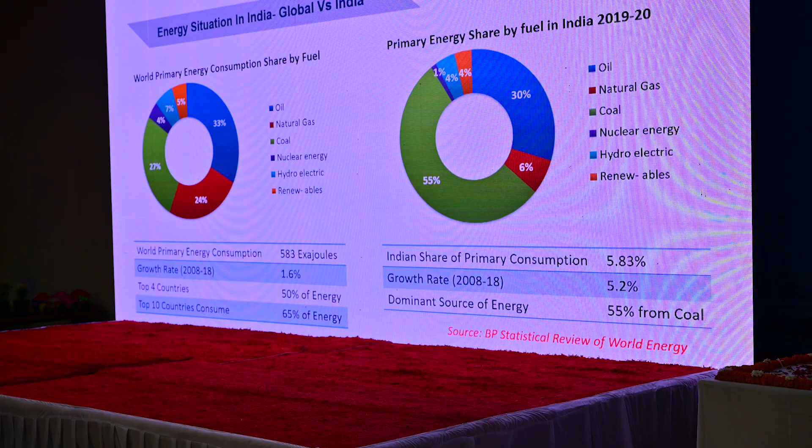Even then, we are the third largest consumer of energy. As I said, the global energy growth rate over one decade is only 1.6% - that means every year the energy demand in the world is growing at the rate of 1.6% only. Whereas for India, it is going at the rate of 5.2%, and it is set to grow further higher. So our energy demand is going to increase further.

Now, the top 10 countries consume about 65% of the total energy, and the top 4 countries consume 50% of the energy. So this energy distribution is not uniform.

The other energy challenge is energy security. Niti Aayog published a paper, the energy security plan or India Energy Security Scenario for 2047. They also indicated that by 2047, coal is going to remain the only dependable energy source for India.

Next, oil dependency on foreign supplies, and quality of coal - we know the quality of coal will go on deteriorating.

Energy access - India has done very well in terms of energy access. The per capita energy consumption is only 24.9 gigajoules versus the world average of 75.7 gigajoules. So per capita it is less, but in quantum we do consume a lot, because of the blue flame revolution, clean cooking gas being supplied to every household, and 100% electrification for all areas.

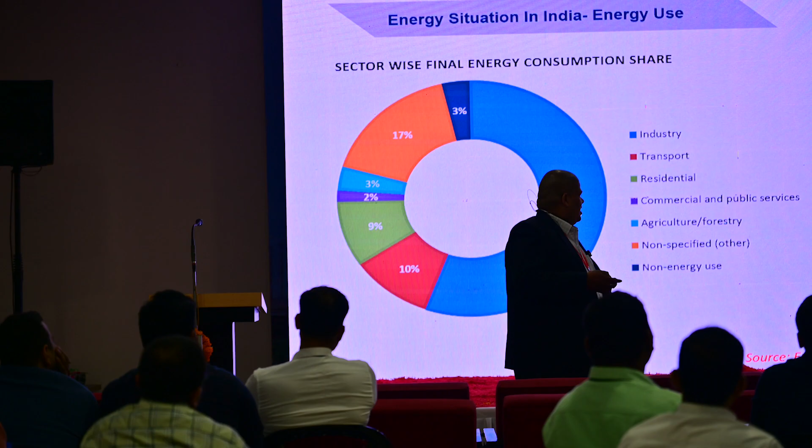Now, coming to energy efficiency and conservation - in terms of policy regimes, the energy management group was established in NPC in 1964. Till that point, there was no activity on energy efficiency in India. After that, in 1970 a fuel policy committee was set up in the planning commission, and in 1978 the Petroleum Conservation Research Association was formed. All these activities finally led to the Energy Conservation Act being notified in 2001.

After the Energy Conservation Act in 2001, over the last two decades there have been a lot of developments - many rules, regulations, and guidelines have come up for all industry sectors, based on which we are carrying out so many activities.

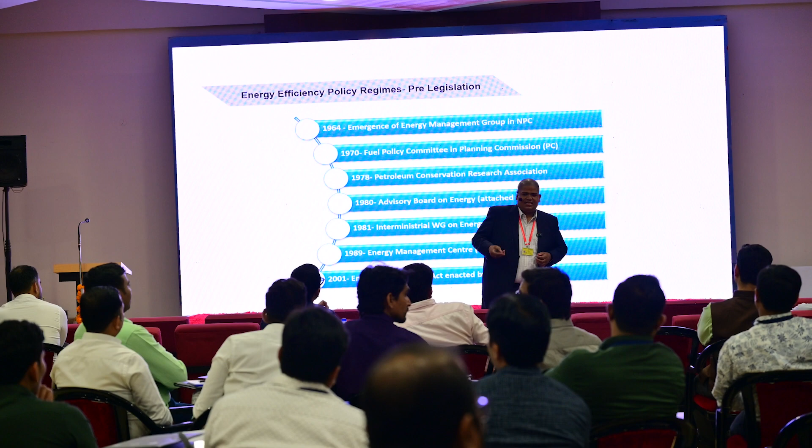Now, in NPC, we are talking a lot about the Bureau of Energy Efficiency, the energy efficiency. In another 2-3 years, this term energy efficiency is going to be replaced by resource efficiency, because now it is not only energy, there are other resources required for industrial production also. There was a draft guideline by the government on the national resource efficiency policy, so later on we will be transiting into resource efficiency guidelines rather than energy efficiency.

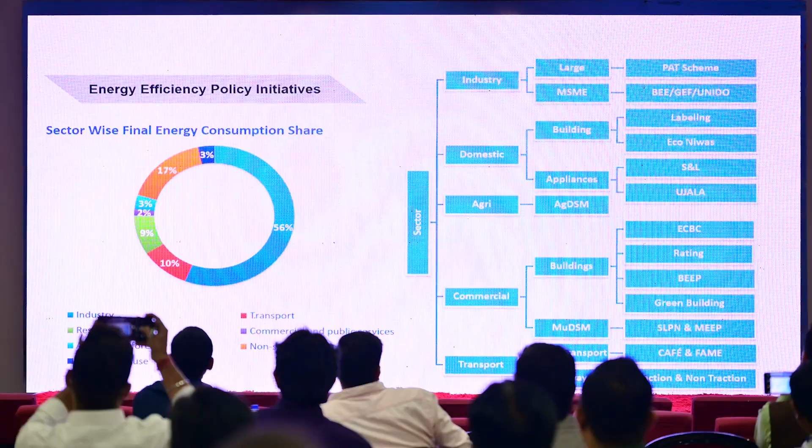This is basically the distribution of guidelines under the Energy Conservation Act, where we are focusing on energy efficiency processes. There are mainly 5 sectors: industry sector, domestic sector, agricultural sector, commercial sector, and transport sector. These are the consumers of total input energy, and till now the government has brought guidelines for every sector to reduce the national energy demand.

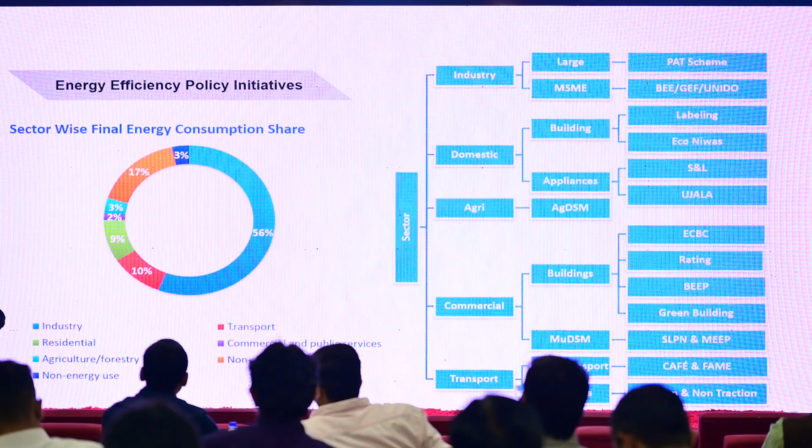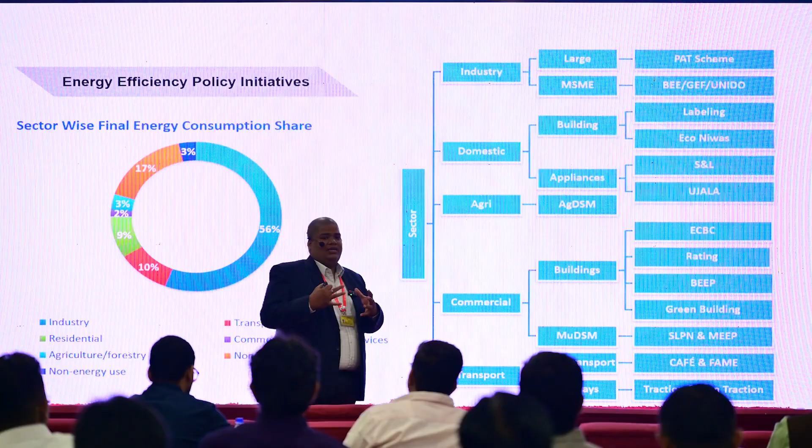If you see the industry sector, again it is large scale industry and the MSME sector. In large scale industry, we know very well about the PAT scheme - Perform, Achieve and Trade. SAIL is a designated consumer under the Energy Conservation Act, so SAIL also has to comply with PAT scheme guidelines. For MSME, since they are not large scale industry, their financial capability is not as strong, so they need a lot of support from the government for demonstrative projects that bring energy efficiency benefits. UNIDO and the DCMSME office are in association, and a lot of schemes are being implemented. We are also a part of it - 2-3 schemes we will discuss later.

Under agricultural sector, there is AGDSM - agricultural demand side management activity - because in agricultural activity basically they are targeting electrical pumping stations, since we need to pump water for agricultural distribution.

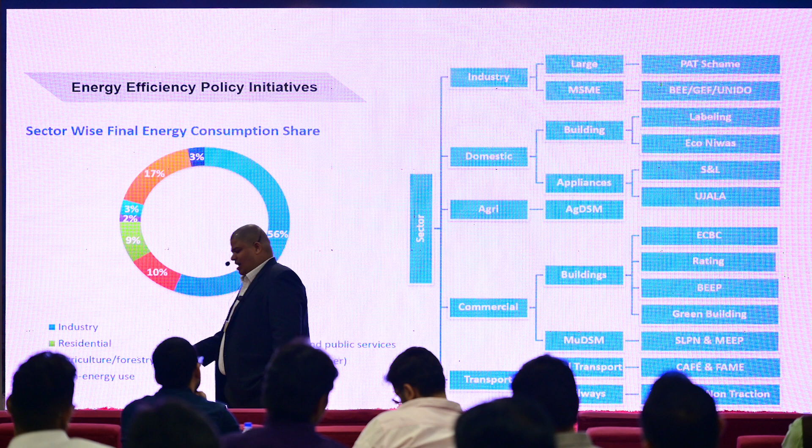Again, under the commercial sector, basically there are 2 things - buildings and MUDSM. For buildings, there is ECBC, Energy Conservation Building Code, which has now been amended; the draft is on the website inviting suggestions. Once the draft is finalized, the revised ECBC will come up, with rating of buildings similar to products. In the municipality sector, basically two programs are running - street lighting replacement with LEDs, and the municipal energy efficient pumping replacement program.

Under the transport sector - road transport and railways - there are two categories. For road transport, it is CAFE and FAME, the BS4 to BS6 transition, and star rating of tires. This is still voluntary, which is why we are not aware of it, but vehicle tires are also being star rated based on their energy efficiency. Railways again have traction and non-traction categories. So these are the 5 sectors and all the schemes being promoted by the government for energy efficiency.

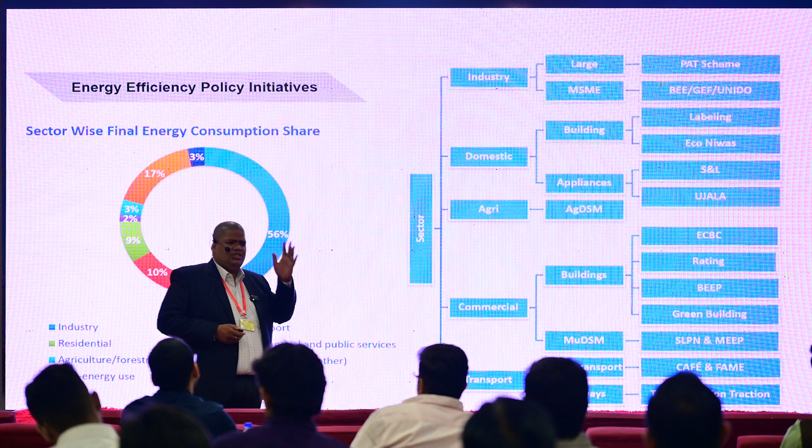But as a large scale industry, we are only concerned about the industrial sector, which is the PAT scheme. Of course, as a domestic consumer, buildings, Eco-Niwas, or appliances also apply to us. Now, coming to today's topic on boilers - efficient boiler and operation of boilers.

Still there is a problem. If you say so many PAT cycles are there, a lot of things has been done, so much energy saving is achieved, still there is some problem. From the industry perspective, when you implement one recommendation, yes, energy saving is achieved, you are okay with that. But from the productivity analyst side, we see it in a different way. I think this is important to discuss with you.

See, if we categorize energy efficiency recommendations, there are 4 types or 4 ways in which we can achieve energy efficiency. One is O&M control - for example if your boiler temperature is above the design or increasing, there is no meaning of that, so there should be a drop in temperature. These are basically pressure drop, pressure changes - these are O&M controls.

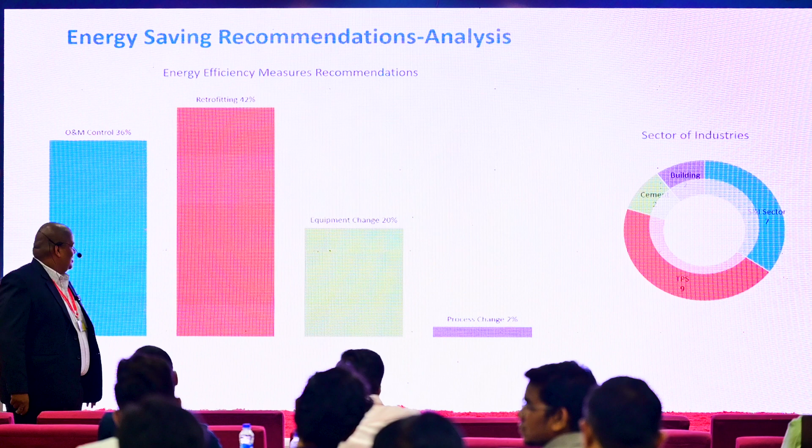42% recommendations are on retrofitting. 20% on equipment change, 2% is process change. I also agree process change is difficult.

Okay, now in the other 3, 80% is coming from O&M control and retrofits, which is not a good sign.

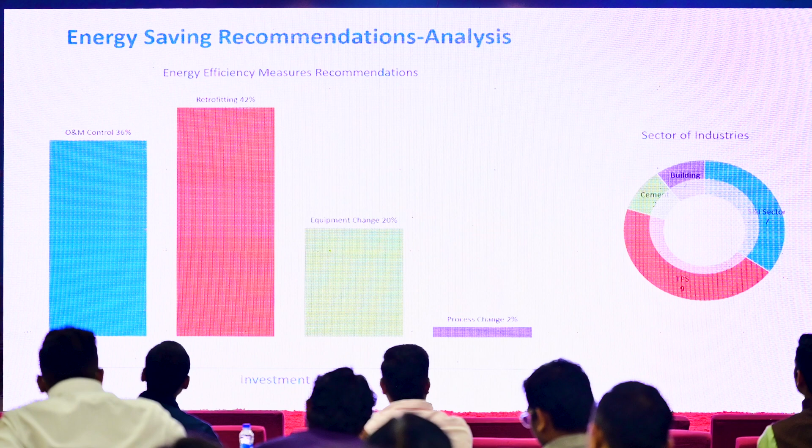Now, okay. You see the implementation part - that was the recommendation part. Now in the implementation part.

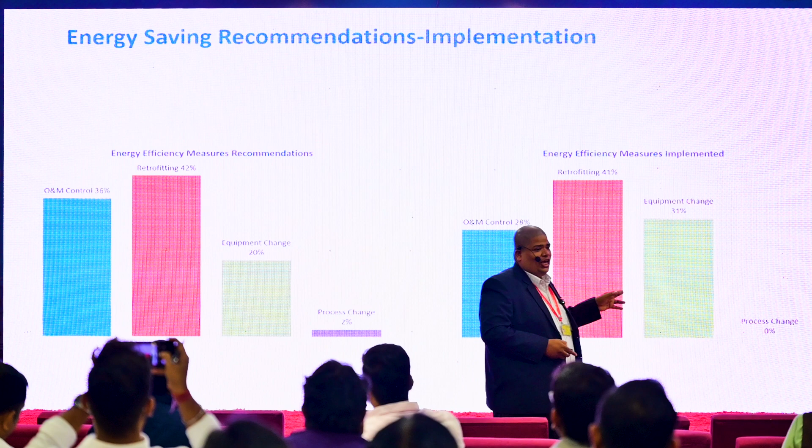28% of recommendations were implemented in O&M, 41% in terms of retrofitting, 31% in terms of equipment change - we'll discuss this 31 and 41. Process change: 0%. Nobody is accepting the process change recommendations.

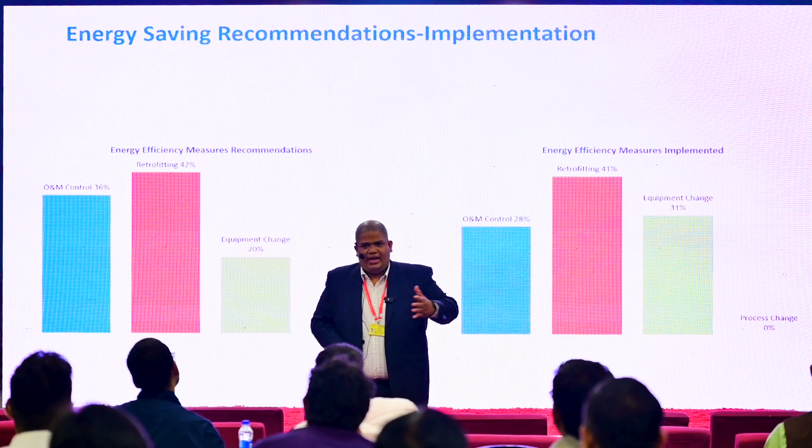Frankly speaking, we don't do process change in the plant. See, when we say process change, people think okay, process change means something is going to happen in my blast furnace - they won't agree, it gets shut down. But if a water pipeline is going somewhere, you take a tapping from it - sir, that is also a process change. When there is a pipeline, when pumps are operating in parallel, and you are taking a number of tappings, the pump efficiency will go down. That is also a process change.

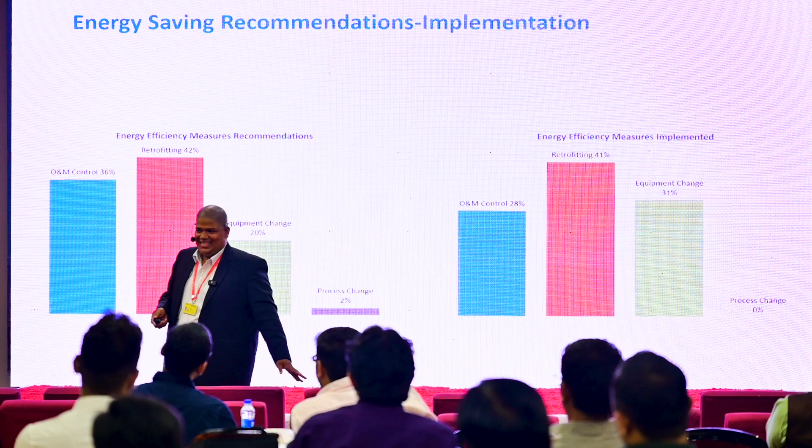Extending a compressed air pipeline - that is also a process change. Retrofitting and equipment change have a little higher recommendation implementation rate because of the introduction of IE3 motors, energy efficient pumps, and so on. There was also a building in this category - because of LED changes there is an impact in equipment change, and retrofitting because of VFDs. Now, coming to the boilers, boiler performance.

So, boiler performance in our plant, how do we carry it out? We carry it out through some standards - ASME PTC 4.1 or IS standard. As per the ASME PTC standard, we follow or carry out the boiler efficiency evaluation.

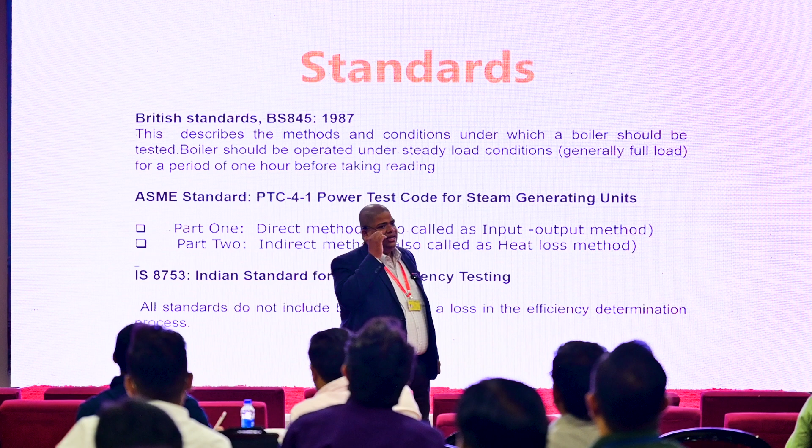If you see the BEE guidelines, there is a direct method, that is the input-output method, and another is the indirect method through the heat loss method. In direct method, we are only looking at output versus input.

Output is boiler output, which is my steam. Steam has some energy. So how do we find that energy? At that pressure and temperature, how much kilocalorie energy it is carrying, that is the output. For input, I know the fuel. If it is coal, quantum of coal into GCV is the energy input. If it is oil or gas, quantum of fuel into GCV or NCV is the quantum of energy.

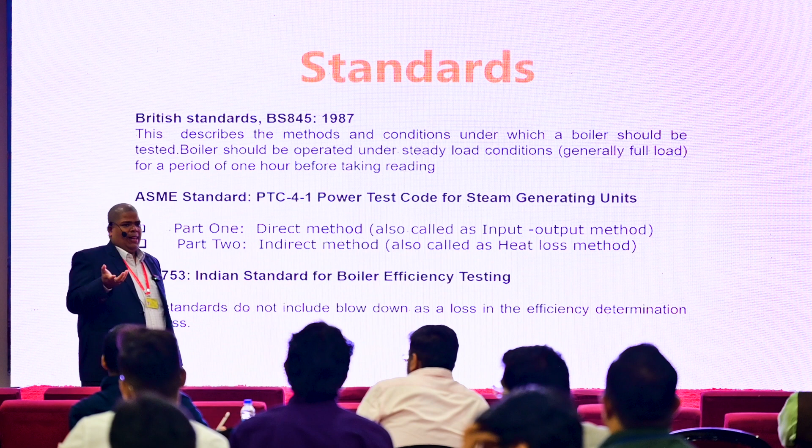We can use the direct method, but most frequently we use the indirect method, because in indirect method we evaluate all the types of losses. So when we see all the losses, we can see which parameter can be controlled, which parameter can be brought down. We evaluate all the losses, and 100 minus all the losses gives you the boiler efficiency.

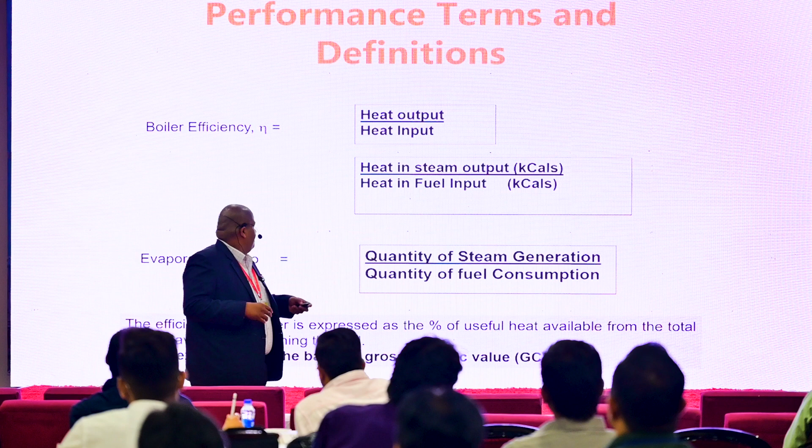This is the indirect method. Direct method is very simple - output divided by input. Output is nothing but your steam flow rate into enthalpy of the steam minus enthalpy of the feed water, because the water coming into the boiler is also carrying certain amount of energy. That difference is actually the energy added in the boiler. So output is only the energy added in the boiler, divided by energy input which is the quantum of energy fired to the boiler. That is the direct method.

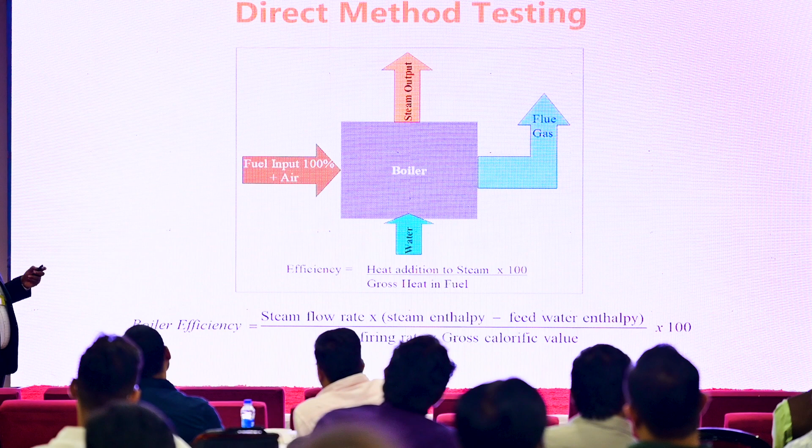In the indirect method, we measure all the losses, then find out what is the quantum of efficiency. First one is dry flue gas loss. What is dry flue gas loss?

When we do a process mapping of a boiler, how many inputs are we giving to the boiler? We are giving 3 inputs - air, fuel, water. These 3 are the inputs to the boiler. And when we see the output, the water goes out as steam, so it is in a closed cycle. The only loss is the blow down part, which we will discuss separately.

When we are doing the ASME PTC 4.1 method of efficiency evaluation, the blow down valve has to be closed during the test time, which is typically around 3 hours. That is why ASME PTC 4.1 does not speak about blow down loss - they don't consider blow down as a loss, because during that time your blow down valve is closed.

But during the running condition, depending on your water treatment plant efficiency, you have to give the blow down. Now that is the water cycle - so now water is in the closed cycle.

Now there are 2 inputs, that is your air and the fuel. The air is at ambient temperature, goes in and comes out as flue gas through the chimney at a higher temperature. Because any matter's quantum of energy content can only be of 2 types - sensible heat or latent heat. So the air, which is only gaining temperature during the combustion process and going out through the chimney, is only gaining sensible heat. So the quantum of heat carried away by the flue gas is nothing but dry flue gas loss.

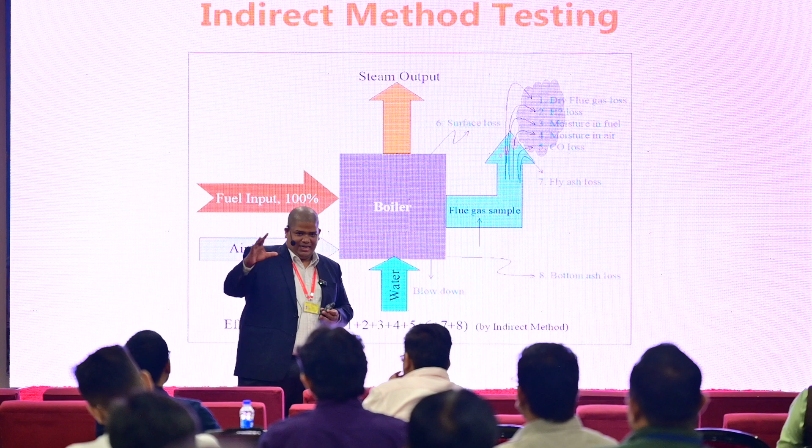Why dry? Because it's sensible heat - the moisture will have both the sensible and the latent part. So only this is the dry flue gas loss. The quantum of air goes in, takes up heat, and goes out at a higher temperature. Now, H2 loss - what is H2 loss?

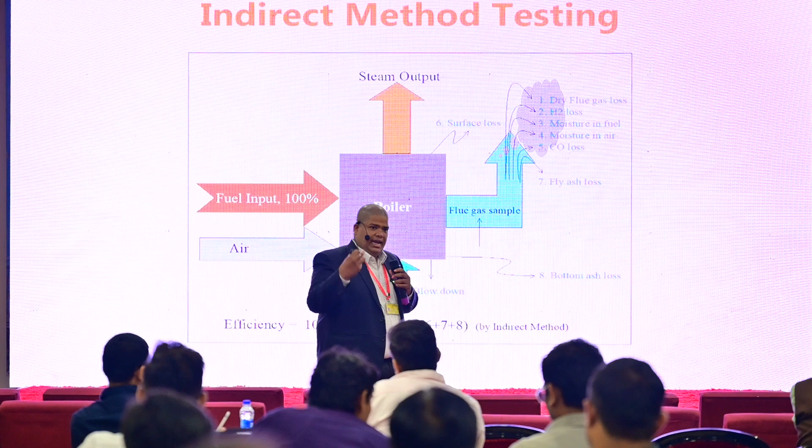That is the hydrogen loss. And as you said, there is also moisture present in the fuel. If coal is carrying some quantity of moisture, that will also take the latent heat plus sensible heat, because that water is at ambient temperature. It will go into the furnace, gain the sensible heat, then latent heat, then go out as vapor.

So H2 loss, moisture in fuel, then moisture in air. Because of the relative humidity, you also have moisture in air. What heat will it carry? It will carry only the sensible heat, because moisture in air is already in the vapor phase, so it will carry only the sensible part and go away.

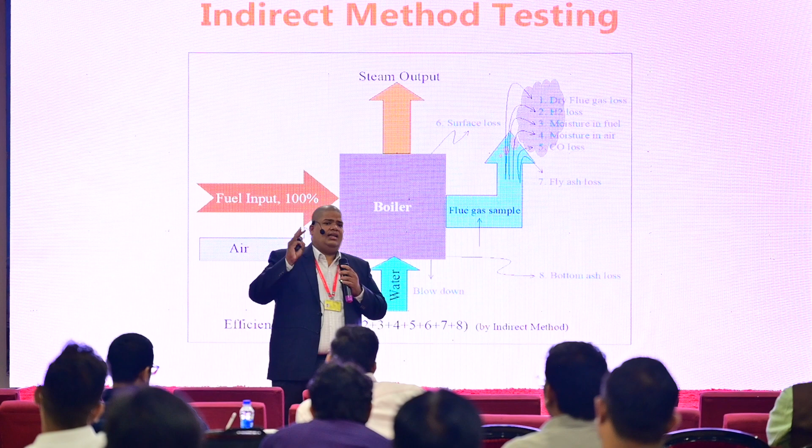CO loss happens due to incomplete combustion of fuel and air. Combustion is basically an exothermic reaction. Carbon combines with oxygen producing carbon dioxide. Hydrogen combines with oxygen producing H2O. Sulfur combines with oxygen producing sulfur dioxide. Only these three chemical exothermic reactions take place during combustion, and they produce energy. No other chemical reaction produces energy.

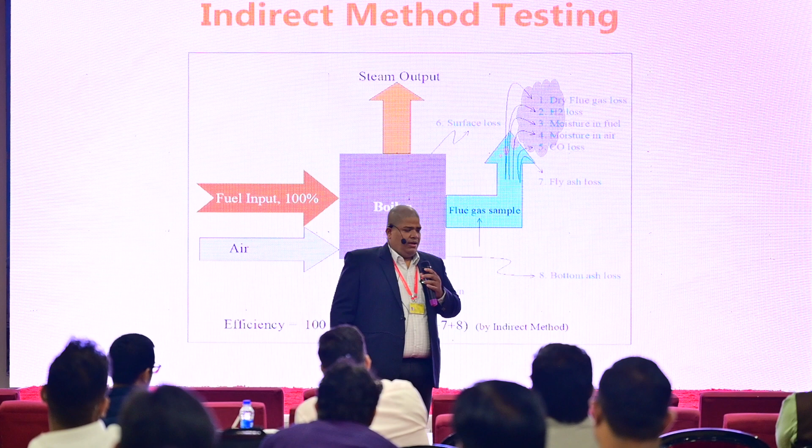Now coming to CO. When you are firing 1 kg of coal, let us say it has about 30% carbon. So fixed carbon quantity is 30%, meaning 300 grams per kg is carbon. But what we are supplying for combustion requires carbon and oxygen. In place of oxygen, we are supplying air, which has only 23% oxygen. So this 230 grams per kg of air and the 300 grams per kg of coal has to properly mix to produce the quantum of heat.

Now this proper mixing in a boiler requires a firing mechanism and a draft system. These two ensure proper mixing of coal and air for producing energy. If the proper mixing of coal and air is not there, you will see carbon monoxide. Carbon monoxide means partial combustion. Partial combustion means how much energy loss?

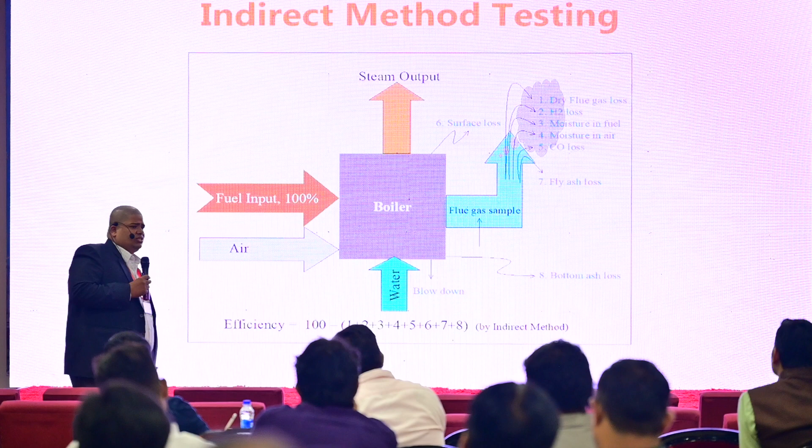Then ash loss. If it is coal, there will be bottom ash and fly ash. So the ash coming out of the boiler will have some quantity of unburnt material present in it. Why unburnt? The air-fuel mixture first will reflect in CO and the carbon content in the bottom ash or fly ash. The second factor is the size of the coal particles.

So regarding the size of coal particles, if you see the technological development of boilers, it started with the spreader stoker boiler. Before that was hand firing, like in coal engines where hand firing was done with coal. Whatever lump size came, you just put it into the furnace chamber. Hand firing, spreader stoker, then...

Yes, now pulverized technology came, and after pulverized, AFBC and CFBC came. So you see, up until pulverization technology, where 70% passes through 200 mesh, 75 micron size coal, the coal size was coming down and coming down.

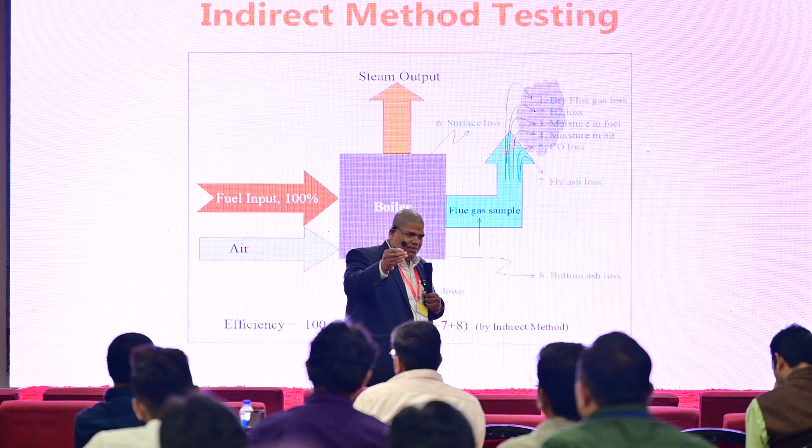Why? Because when we bring down the coal size, there is a high chance of carbon particles combining with oxygen producing carbon dioxide. That is why more quantum of heat was produced up to pulverized technology. But what happened is, again from pulverized to CFBC, we are increasing the coal size. CFBC uses 6 to 10 mm coal size.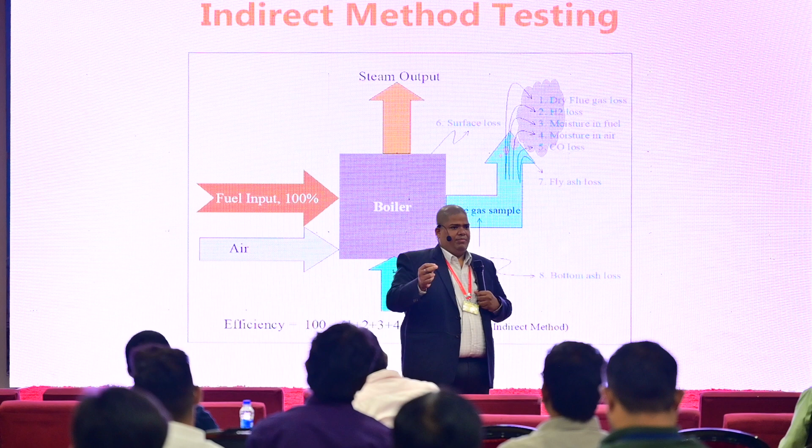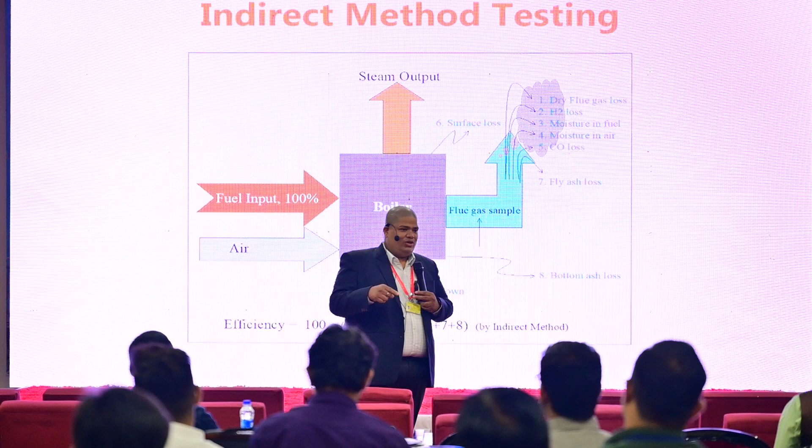The finer the coal, the more electrical energy you require for pulverization in the mills. So there is an energy balance - the quantum of energy you spend creating the fines, when you burn it, you should get more than that back. But when your ash content is as high as 45%, for every kg of coal you grind, you get 450 grams of ash. So to avoid that, we use higher coal size.

Because of coal quality only, we have gone for CFBC boilers. There are other advantages too, which we will discuss.

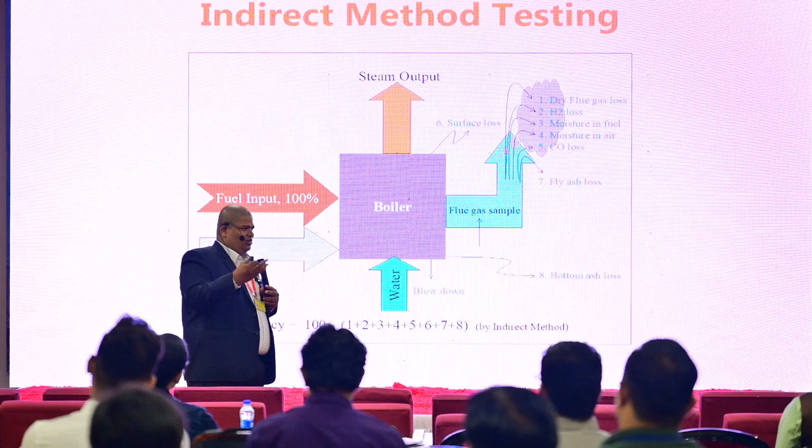Now, surface loss, the last loss, that is the radiation and convection loss from the surface of the boiler. This is very easy, the calculation method is also easy. I will not go into the calculation methods.

We will discuss some case studies. So basically, what data do you require for the efficiency calculation? All this data we measure every day in the power plant, in the boilers.

You require the ultimate analysis of coal. Ultimate analysis of coal is nothing but carbon, hydrogen, oxygen, nitrogen, sulfur, H2O and ash. If you have facility to conduct the proximate analysis but not the ultimate analysis, you can conduct the proximate analysis, and there is an empirical formula to find out all these factors.

You want ultimate analysis of the fuel, GCV, and oxygen of the fuel flue gas. Oxygen in the flue gas - normally for the boiler part, we say oxygen after eco exit, oxygen at the eco exit.

So there is an oxygen probe. During the energy audit also, we bring in our probe and measure the oxygen at the eco exit, because after eco exit, there is no role of the O2. So 3 to 4% excess oxygen is required, because we want to maintain 20% excess air to ensure the proper mixing of coal and air.

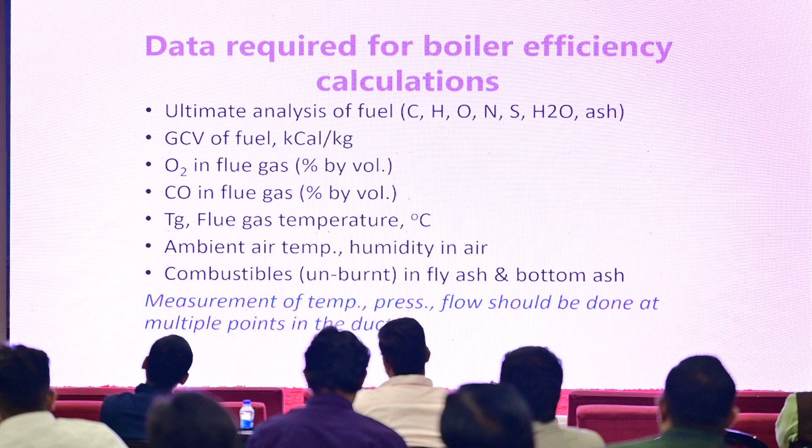CO in the flue gas - if the mixing is not proper, in most cases, even though there is excess oxygen, you will see CO also. Then temperature, ambient temperature, humidity, combustible in fly ash and bottom ash.

Only these data we require for the efficiency evaluation of the boiler. Right, sir?

So what instruments do we require? We require a flue gas analyzer, temperature indicator, draft gauge, and a flow meter.

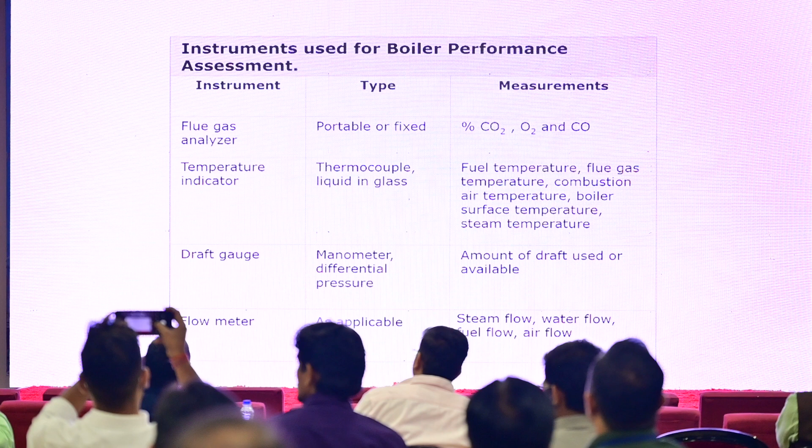If these data are with us, then we can find out. Of course, for indirect method, we don't require the flow meter also. If you have a pitot tube also, that is also fine, because for airflow we need to measure. Water flow meter is not required. If you use pitot tube also, that is fine.

Now in the duct, the measurement - our oxygen probe is fixed, a zirconia probe. Now that may not give a proper reading also. Sometimes there can be a stagnation of flue gas at that location.

So that is why it is always advisable that you carry out sample testing at different intervals.

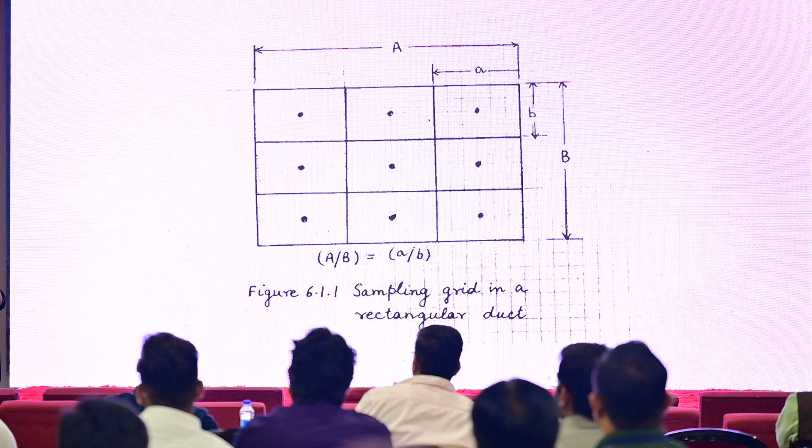So you can just be careful about the sampling techniques. If it is a square duct, how samples you have to take. If it is circular, how to take the samples. Then the specification, these things also matter.

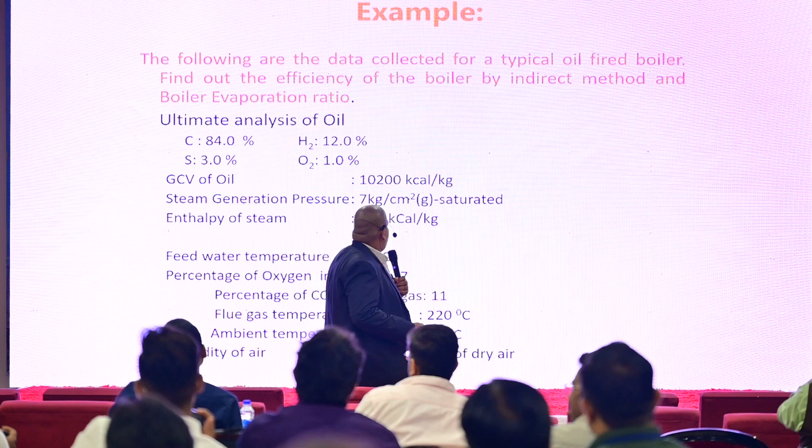The data sheet, and finally the efficiency evaluation. As I said, only the ultimate analysis of fuel is required. This is the oil example, oil-fired boiler.

So that is the GCV, then the steam pressure, enthalpy, feed water temperature, the oxygen in the flue gas, CO2 percentage - so oxygen or CO2, either is okay. Either you measure the CO2 or you measure the oxygen. Normally you have the oxygen probe, so you take the O2 measurements. Then the flue gas temperature, ambient temperature, humidity of air. These are the input data.

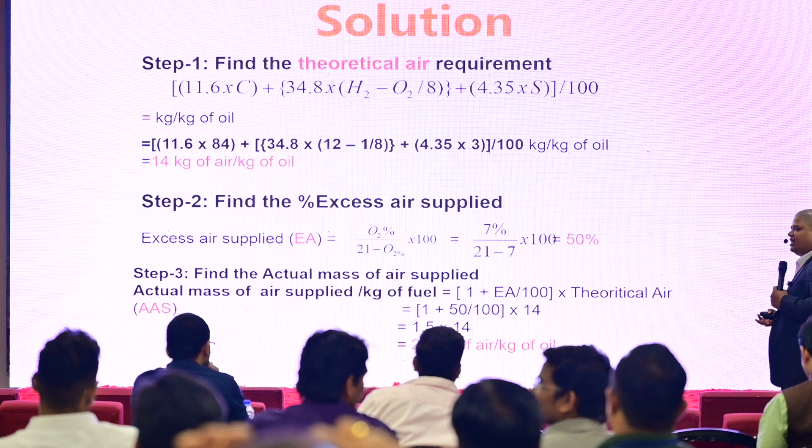This is a little bit of calculation. First is basically the stoichiometric calculation - stoichiometric calculation means the quantum of air required for your fuel. Because every shift the fuel quality is changing, and if every time the fuel quality is changing, the quantum of air requirement also changes. But at present, what control do we have?

Are we calculating the excess air, theoretical air in plant? No. Then what is the control mechanism? How we are doing the adjustments? Let us say today the coal is coming at 3500 GCV, tomorrow there is another coal which is coming at 4000 GCV.

Yes. So for us, we are only looking at the O2. Whatever variation in the coal quality may be, we have to maintain 3% O2.

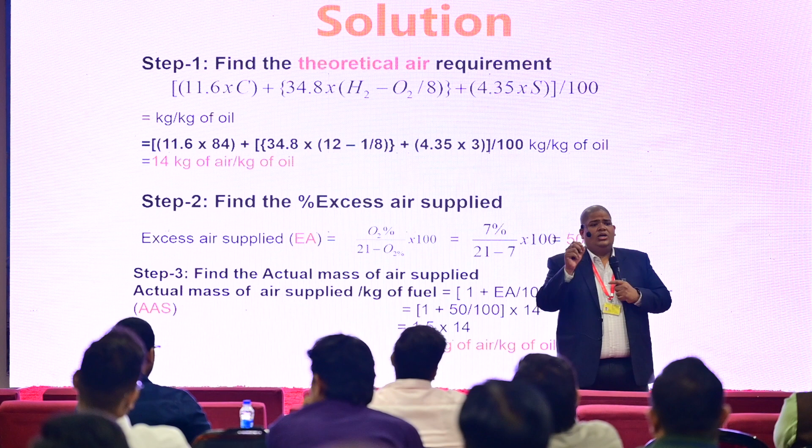So this is the theoretical air calculation. Then you measure the O2, find out the quantum of excess air. That means if you have 3% O2, O2 by 21 minus O2, so 3 by 21 minus O2, that is the percentage of excess air you are supplying into the boiler.

So 20% excess air is fine to ensure the solid fuel, but if it is gaseous fuels, you have to further bring it down.

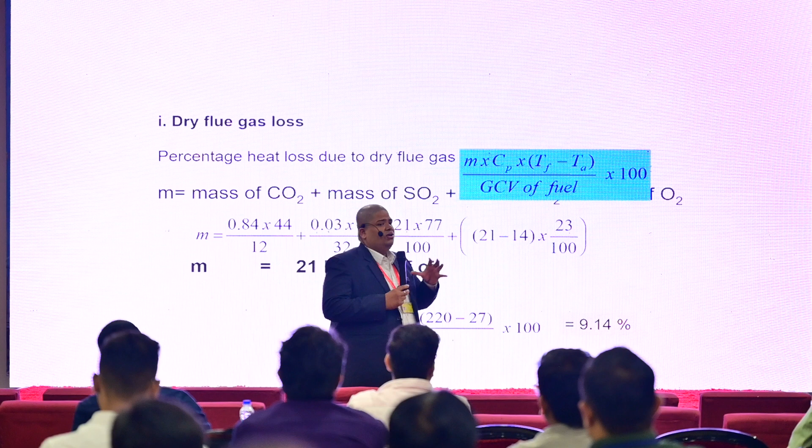Then the quantum of flue gas into m Cp delta T, because it is taking sensible heat only. So quantum of flue gas is nothing but quantum of air plus non-ash portion of the fuel.

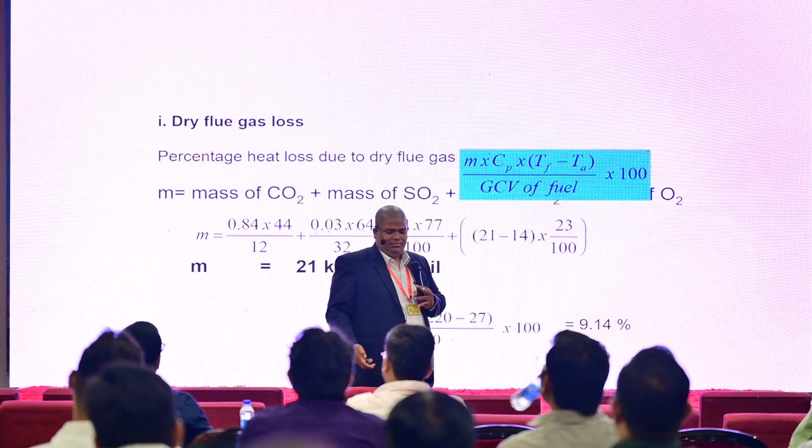Okay, then because of hydrogen, you see, hydrogen, as I said, it will take both latent heat as well as the sensible heat. So latent heat, how we calculate? M delta H, mass of water into delta H is latent heat of water, plus Cp delta T, sensible part it will take. So for mass of water, it is basically 9H2.

9H2, why? Hydrogen will combine with oxygen producing H2O. So 1 kg of hydrogen will produce 9 kg of water, that is why it is 9H2. So it gives you the mass of water. 584 plus Cp delta T, 584 is the latent heat.

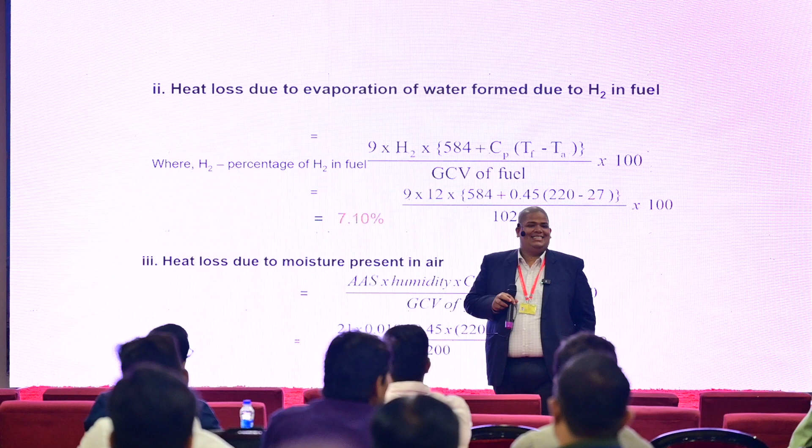At atmospheric pressure, what is the latent heat of water? Yes, sir? 540 kilocalorie per kg. So at atmospheric pressure, it is 540 kilocalorie per kg. Now, if it is 540 per kg, why it is 584?

Because the combustion is at a slight negative pressure. So if you see the enthalpy diagram of steam, it is a bell curve. So you reduce the pressure, more quantity of latent heat is required. That is the technology for supercritical, no? Supercritical, because in power plant we are not able to use the latent heat part.

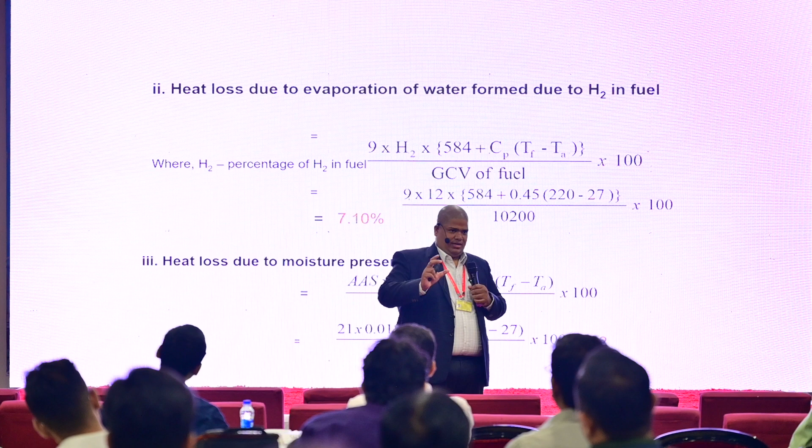So in supercritical, you increase the pressure to 221 bar, that is the critical point. So you don't require to supply the latent heat to the boiler. So that gives you addition in the plant efficiency. So when your pressure is low, your latent heat will increase.

Then of course the humidity part. When you add all the losses, bottom ash losses, fly ash losses, sensible heat losses, moisture losses, hydrogen, so you add, you will get the boiler efficiency.

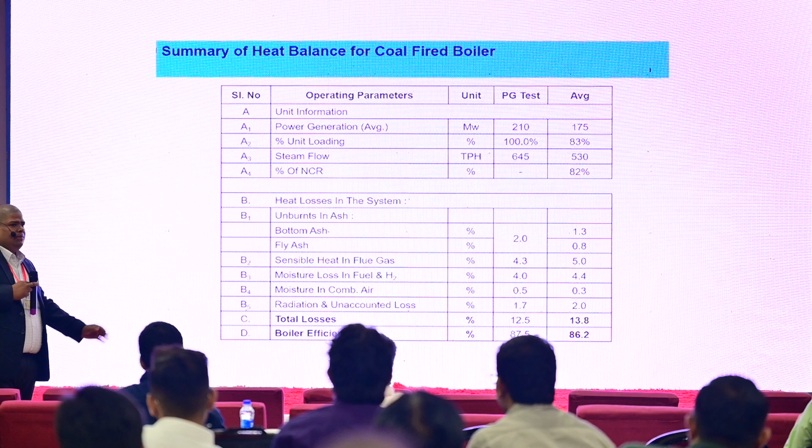Now coming to the interpretation of those results, the standard says this much. The ASME PTC 4.1 that we discussed, this tells us how to calculate all these losses, what are the formulas, what is the efficiency. But now as an engineer we have to interpret, because we cannot simply go by the recommendation and change the boiler.

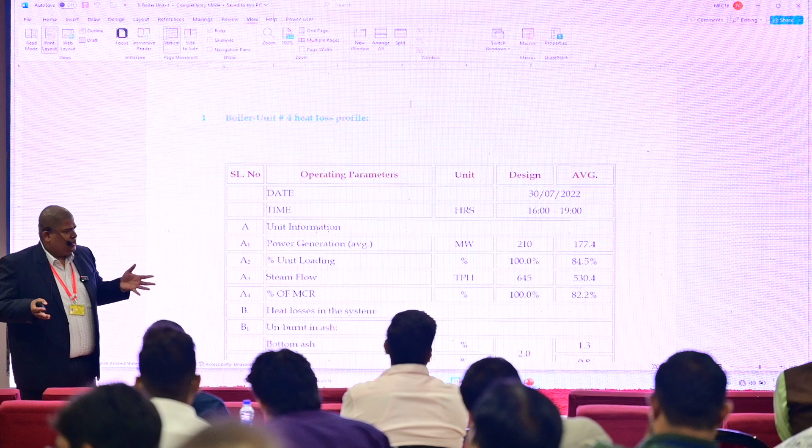This is a 210 megawatt power plant. Unit loading is 84%. So when we conduct the trial, we also ensure that it is above 75% loaded, because the loading will also have an impact on the efficiency. So loading is 84%, steam flow is about 82% of the MCR.

You see all the losses - bottom ash losses, fly ash losses, the sensible heat loss to flue gas, moisture and hydrogen loss, moisture in air, surface heat loss, total loss. So 87.8 was the design efficiency, 86.7 is the actual. So it's still about 1% difference, because there can be calculation errors and some assumptions. Surface and radiation losses are difficult to measure.

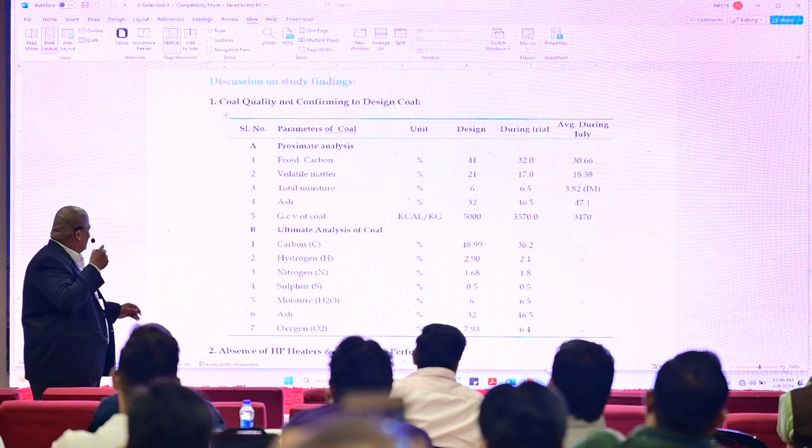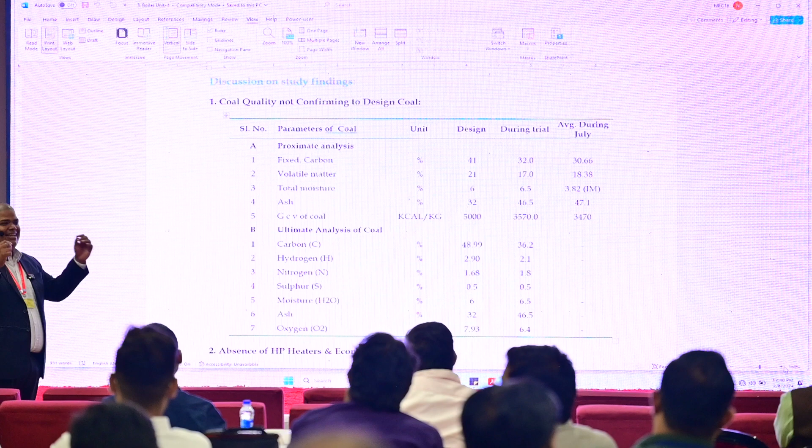So this is the design of the 210 megawatt power plant at 5000 kilocalorie per kg. We are operating at 3500. So it's 1500 kilocalorie less - so can we put the blame here? Why sir? Do you agree or not sir? Shouldn't there be some reduction, sir?

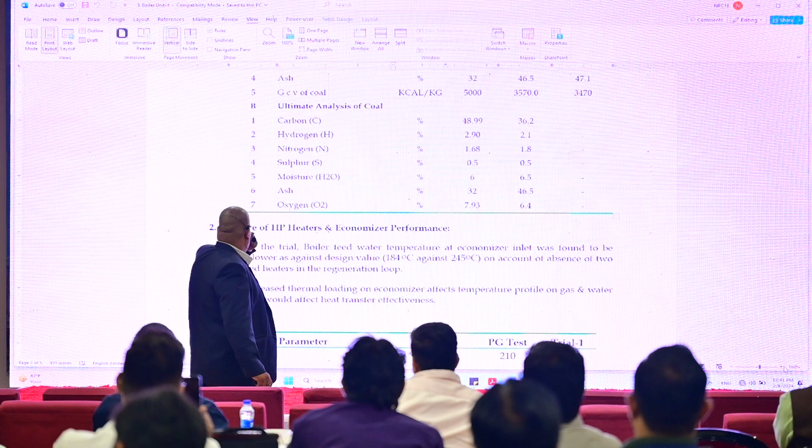Yes, of course I agree, but not fully. Just a second - you see the carbon percentage, the quantum of carbon is 48 to 36, hydrogen 2.9 to 2.1, sulfur 0.5. It's okay. See, the fixed carbon quantity has come down, right sir? When the fixed carbon quantity has come down, that basically means there is an increase in the ash quantity. So ash quantity means you will have problems in the mills, right sir? So if you have problems in the mills, then you cannot simply put the blame on the coal quality. Coal quality I accept, which is one of the factors.

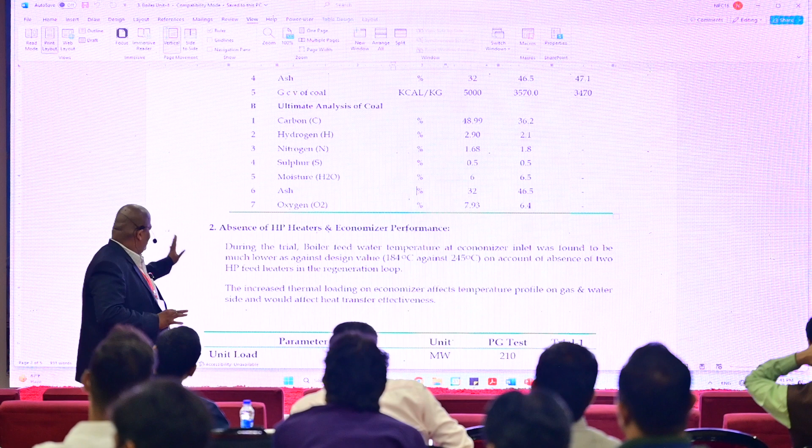Let us go down. Number one, the other reasons are the absence of HP heater and economizer performance. The economizer is designed to take feed water at about 245 degrees centigrade. So after completing the turbine cycle, the feed water inlet temperature to the economizer has to be 245 degrees centigrade. But in the plant, what happened is two HP heaters are out. When two HP heaters are out, the feed water is going at 184 degrees centigrade. So the boiler now has to perform the work of the HP heater also.

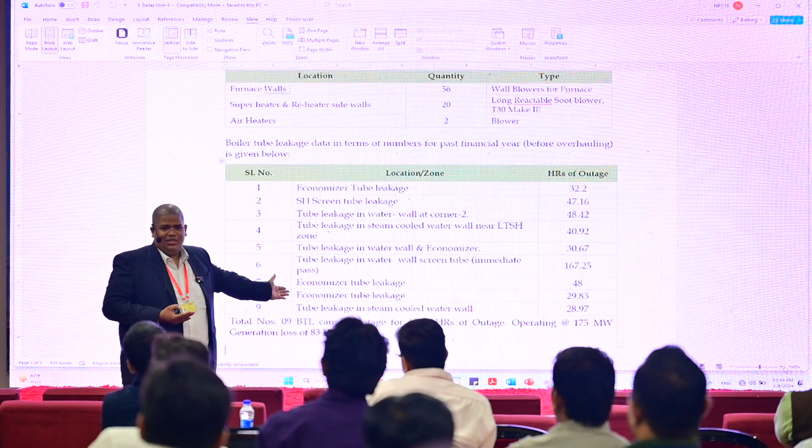So boiler tube leakage, when we do the indirect method efficiency calculation, showing all this - why I am showing is, this is not reflected in the standard. Because of this BTL, whatever loss we have incurred, this is not reflected in the ASME PTC 4.1. In that standard, this is not calculated.

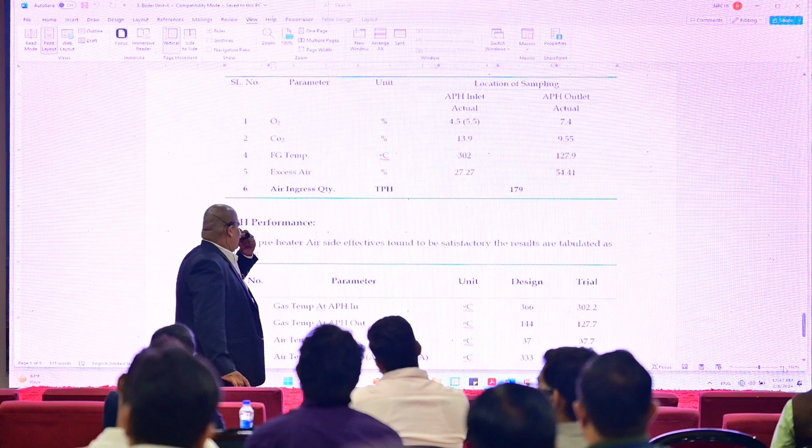Next, another case study, the PDF. See the second case study, expand it a little, and next page. These are the data collected during the audit process. This case study is an integrated steel plant, similar to yours. Next page - it is a 60 megawatt unit, CFBC boiler. Next page. It's okay, it's okay. You go to the next page.

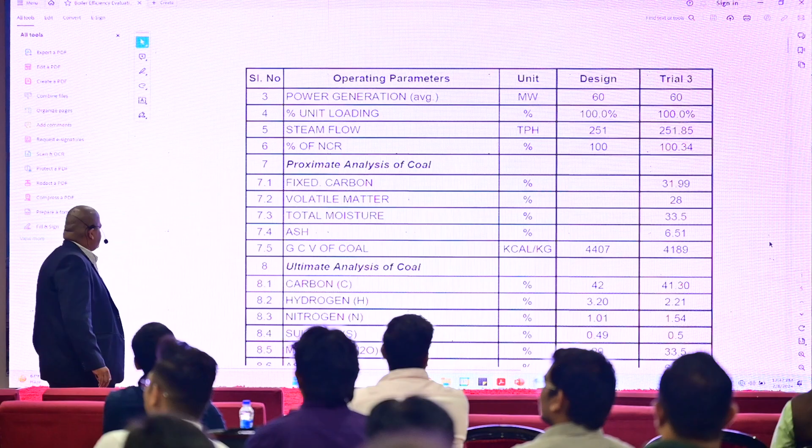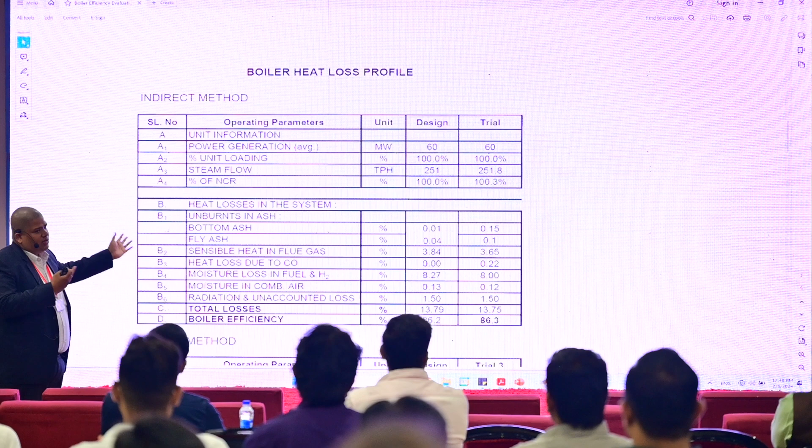Because why am I showing you this? Because only with the standard is evaluation easy - once you see the standard, prepare the Excel. But there are a lot of interpretation problems. You see, this is a 60 megawatt unit. Just go down, yeah, just okay. Now you tell me, as an energy auditor, what we will recommend here. You see the losses, what we discussed. What recommendation will we bring in?

You see it is a 60 megawatt unit, 100% loading, steam flow as per design, NCR 100%, unburnt loss is almost okay, sensible heat loss is less, CO loss insignificant, H2 loss within limits, moisture in ambient air within limits, radiation and unaccounted loss within limits, boiler efficiency at par with design.

Then what to do? Yes sir? Bottom ash, slightly scope is there, I agree. But they had a major problem.

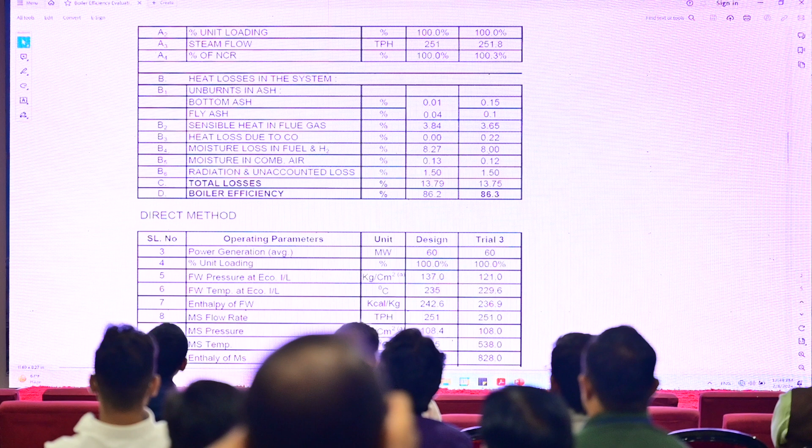You see the direct method? Yes sir. CO is also causing a bit of loss, 0.2, okay. But you see the direct method? Direct method, normally people don't do the direct method, but here we tried both the methods, direct and indirect.

77. Yes sir. Feed water pressure, feed enthalpy of pressure, yes it is lower, 137 to 121, correct? But what to recommend? See, indirect method efficiency, as per ASME PTC 4.1, we calculated 86.3. It is same as design. Direct method, but it is coming 77. So to leave it to operate like that, or what to do?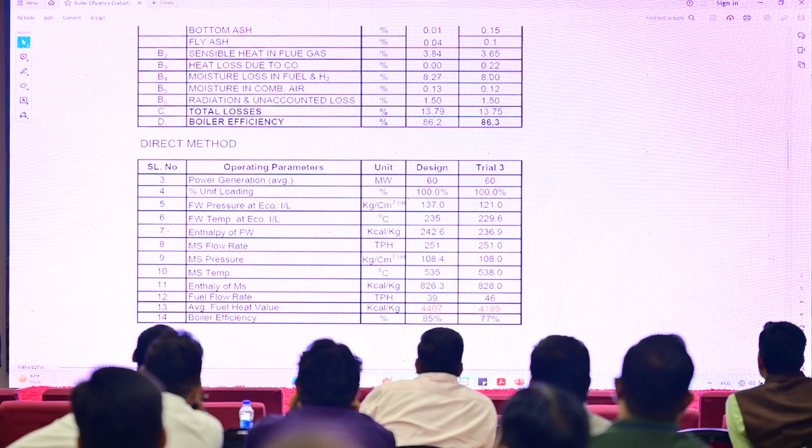Normally in industries, when we do a direct method as well as the indirect method, if the difference is 2 to 3% it is fine. If it is more than 3%, then there is some issue. What issue can it be? Sir? Calorific value.

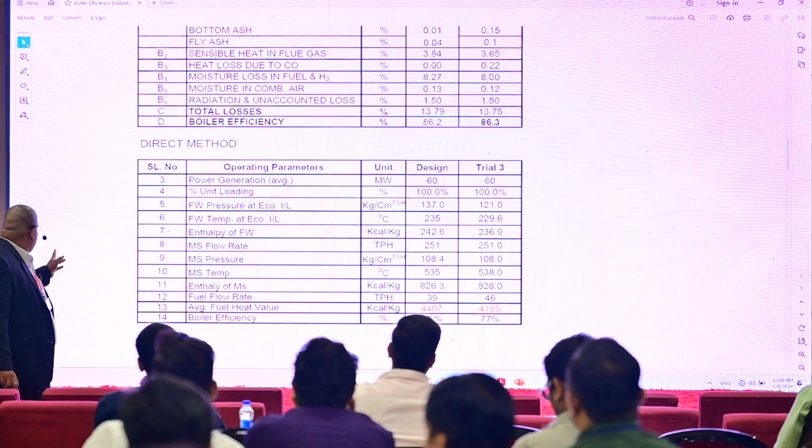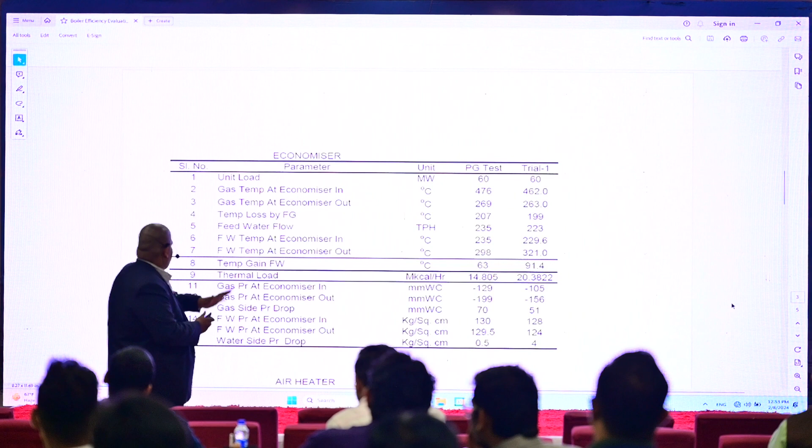You see the economizer performance. What is the temperature of feed water inlet? 235 is design, 229 is the actual input. Feed water at economizer outlet, 298. Out is 321. So what can be the possible reasons?

Secondary combustion. That means because residence time is too short, there is carryover, there is secondary combustion, or there is Boudouard reaction, so that the CO formed because of the Boudouard reaction after the combustion zone, because oxygen is available, is burning out again. Yes sir. So because of post combustion, the combustion not in the furnace zone, this temperature is high in the economizer. The problem is, in the previous slide you saw, the feed water pressure is 121. Now at 121 kg, this is reaching the steam evaporation temperature. So the evaporation may start from the economizer itself.

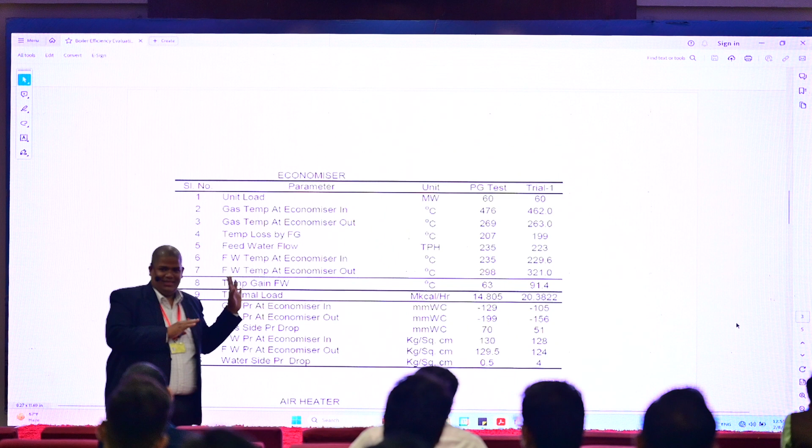This is absent in ASME PTC 4.1. ASME PTC 4.1 only tells me my boiler is very fine. Right sir? But we need to do component-wise analysis. That was the result process of this one. Okay, back to the presentation.

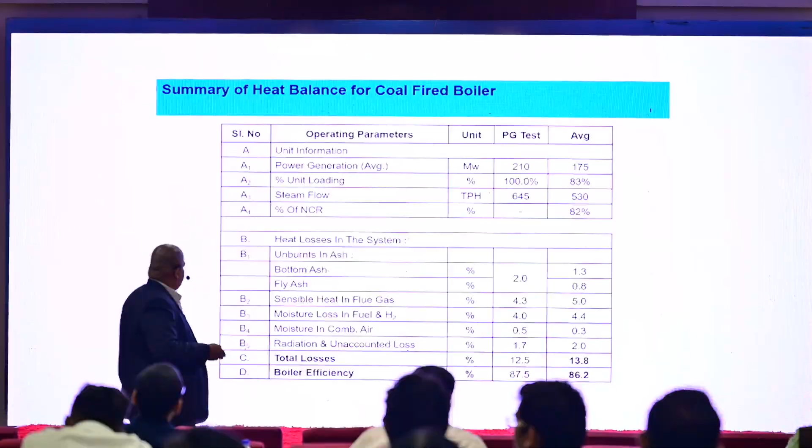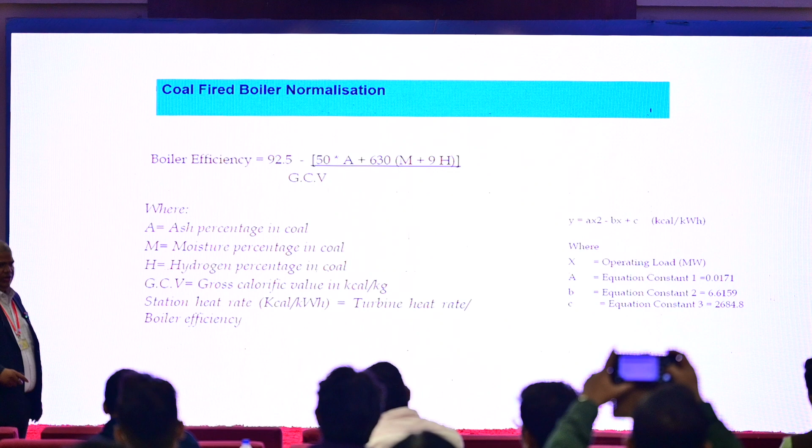So this is a normalization criteria because of fuel quality. When we say because of higher ash content, GCV becomes poor, because of that my boiler efficiency goes down, how much will it go down? This is the formula to calculate how much deterioration in boiler efficiency happens because of fuel quality reduction. Energy conservation opportunities, whatever we discussed.

Yes, now I think I have crossed the limits, but coming to the final comments on the boiler performance. You see, all the schemes, or normally in energy efficiency when we see supply energy efficiency, end use efficiency, and lifestyle efficiency. What is lifestyle efficiency?

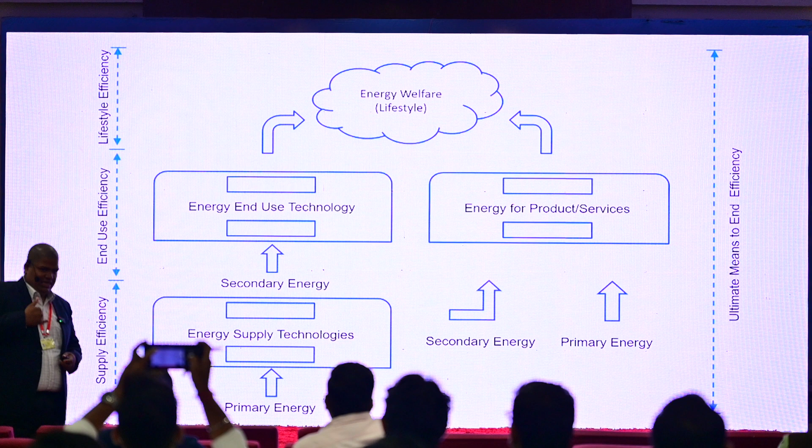Sir, I require ambient temperature of 25 degrees centigrade and relative humidity of 50% RH. That is my lifestyle requirement. To meet this, I need AC. So AC can run 24 hours, AC can run 8 hours, AC can run 3 hours also. That depends on my lifestyle efficiency. To manufacture AC, and AC will have an efficiency of 90% or 95%, that is end use efficiency. And supply side, all the back-end activities for the AC operation and control, that is supply side efficiency.

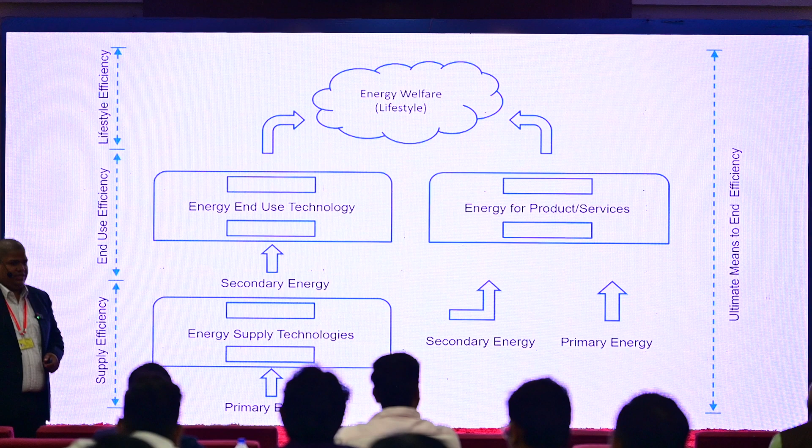So the next decade will be for lifestyle efficiency. Right sir? And what new things will come up in the energy efficiency sector? That will be AI and data analytics.

Now in energy efficiency, there are 3 types of services available. One is energy auditing and capacity training programs, that we are doing, NPC is doing it, and industries are availing it. Second is ESCO services, where one company will come and implement certain energy conservation activities in your company and you pay them. That is also there. But this automated energy performance monitoring, we haven't gone into it, at least in our country. That is one thing. Second is design efficiency.

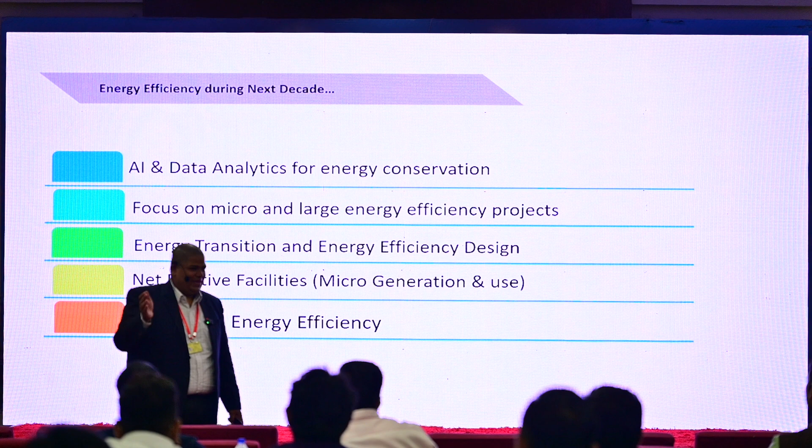Still now, we are least bothered on the design efficiency. Even now, the Energy Conservation Act is 20 years old, yet we are still talking about constructing a building and then installing PV cells on the rooftop to generate electricity. In UAE, they are talking about building integrated photovoltaics, so the building construction itself will be with photovoltaics. Our thinking is let us construct the building, then use the rooftop for PV. Their idea is let us construct the building with PV itself.

That is BIPV, Building Integrated Photovoltaic Design. So design efficiency and energy transition - energy transition is again going to be the next chapter. If there is no further question, I think I have exceeded my given time. If there is a question, of course, we can discuss.

Yes, sir? M&V experts, yes.

In energy auditing, there are three things: one is our energy manager, one is energy auditor, another is accredited energy auditor. For energy manager, the exam is being conducted - there are 4 papers you have to appear for. If you pass 3 papers, you become an energy manager. And for every organization, it is mandatory to appoint an energy manager.

Energy auditor, who passes the 4th paper, becomes an energy auditor. An energy auditor, after 3 years of experience in energy auditing, can apply for accreditation. When he applies, if his accreditation is approved, he can become an accredited energy auditor. Again, if you are conducting energy audit in a steel and iron plant, your accreditation will be for the steel and iron sector only. After completing this accreditation, you can be an M&V expert for the steel and iron sector only.